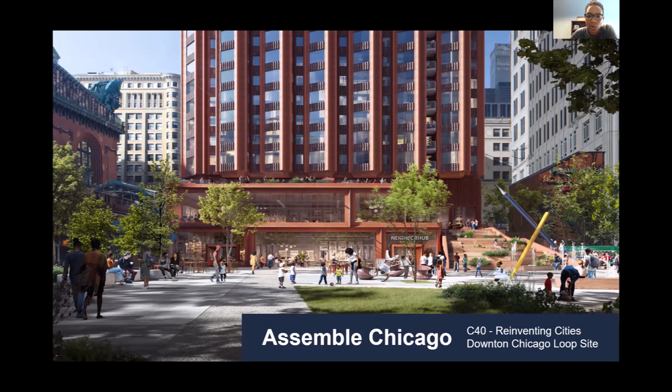Thanks, Brett. Hi, Kamina Brooks, Senior Project Manager with The Community Builders, also known as TCB. We are a mixed income housing and community developer. We also have a property management arm, as well as a community life arm, which provides wraparound services to our residents. We are headquartered in Boston, but we have regional offices throughout the East Coast and Midwest, including Chicago, and I operate out of the Chicago office. Excited to be here with the moderator, other panelists, and the guests today.

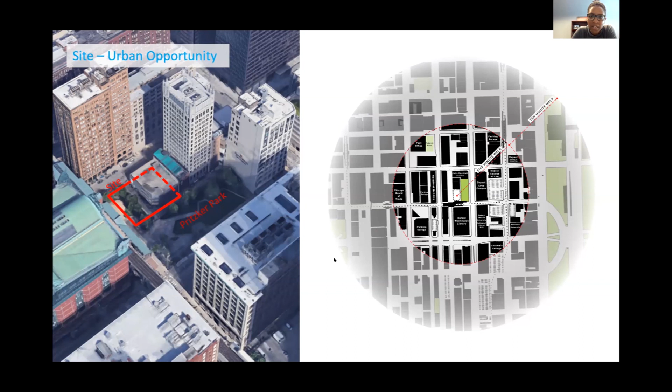In Chicago, the city identified an underutilized city-owned lot for the C40 Reinventing Cities competition in downtown Chicago. The site is an underutilized or unused parking garage and a sort of underutilized park, adjacent to public transit, as well as walking distance to employment opportunities, recreation, retail, cultural centers, and even the Chicago lakefront. I'll talk a bit about the project overview at the site.

In response to the RFP, we proposed a 20-story mixed-use building with 207 mixed-income apartments, affordable to moderate and low-income working households, within a carbon neutral development.

As part of the competition, we were tasked with incorporating C40's climate challenges into our development. The challenges C40 posed are around addressing energy efficiency, low carbon, climate resiliency, ecological services, green jobs, water management, and innovative architecture.

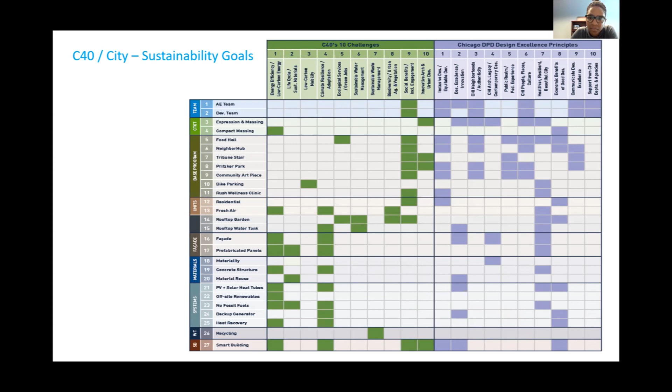Some of our sustainable features to highlight within the Assemble Chicago development include limited glazing on our facade, with a window-to-wall ratio of 25%. We also introduced a low carbon mixed concrete structure.

We are using a newly developed low carbon mix designed with up to 30% less embodied carbon. We're also incorporating smart building technology, which meters energy usage and provides data to residents to influence their behaviors, and with property management, we will seek to incentivize residents around energy and water reduction.

We are also incorporating efficient water systems, rainwater harvesting and rooftop storage for toilet flushing, highly efficient heat pump driven electric hot water heaters, and shower drain heat recovery, as well as fresh air systems with a hybrid natural ventilation mode.

In terms of sustainable transportation, our building is adjacent to the CTA transit system, the L station, and we are not incorporating any parking on site. Residents will have to rely on public transit as well as walkability to downtown jobs, schools, restaurants, and entertainment. Lastly, we have renewable energy generation through on and off-site solar PV arrays.

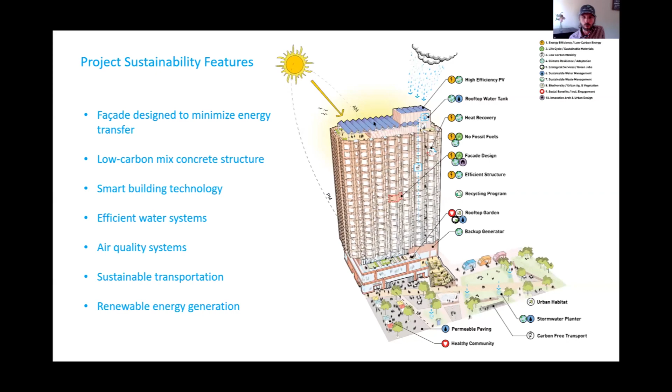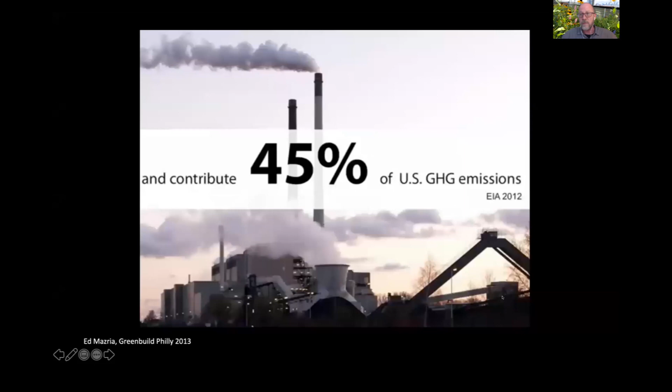My answer to the question is pretty straightforward: it's the only responsible thing to do. What do I mean by that? As an architect, the knowledge that buildings are responsible for almost half of all greenhouse gas emissions—let that sink in, half—means we don't have a chance in hell of solving the climate crisis if we don't solve it with buildings, period. Even though COP21, the Paris Climate Agreement, calls for essentially carbon neutral buildings by 2050, we don't even have that much time.

This is an interesting graph by Ed Mazria, who drew a line from peak emissions in 2020 to zero in 2050.

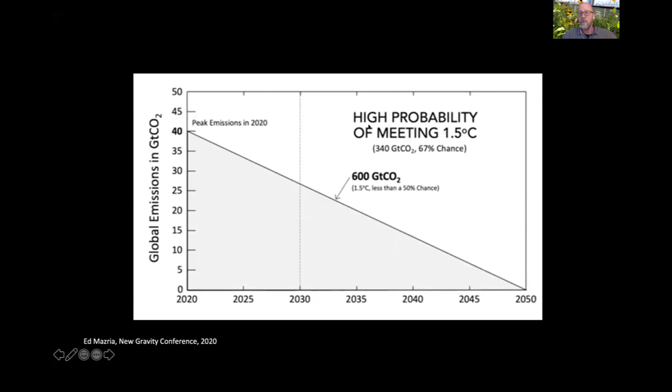That would be 600 gigatons of CO2 we'd be emitting. That's almost twice what we have to emit. And so we've squandered so many years. We actually don't have until 2050.

We've got less than 10 years to solve this. And what this means is carbon neutral buildings need to be standard by 2030. What does that mean? In my head, that means buildings need to generate what they need on their own site, not so much through carbon offsets, because I think that can get really tricky, but literally generating everything the building needs. So a typical row house like this has a roof that big to do all the work that it needs to do. And so how do you do that?

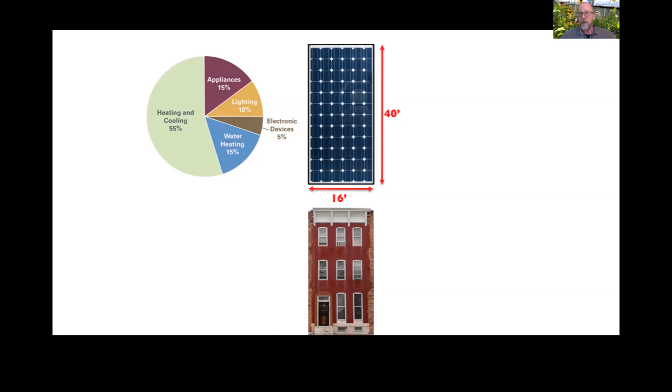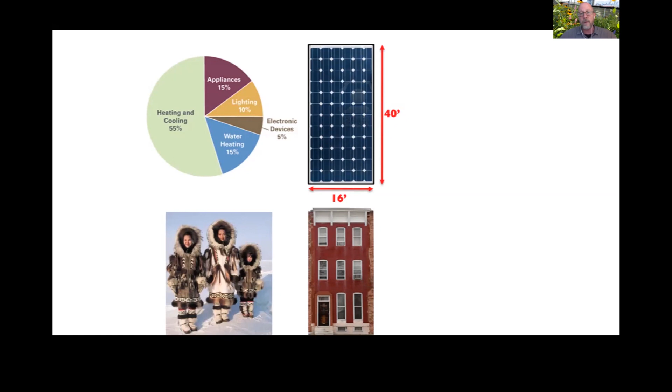Well, heating and cooling is more than half of the energy consumption. So what's the best heating and cooling system out there? It's a coat, a really good coat, a really tight and well-insulated coat. And that is the essence of Passive House, the Passive House building standard. It's a fabric-first approach to building. And it's the best tool that I know to radically reduce the amount of energy consumption that a building needs first. And that's what you got to do first before you talk about solar or anything else. It's basically just really, really good building science principles that we don't have enough time to talk about right now.

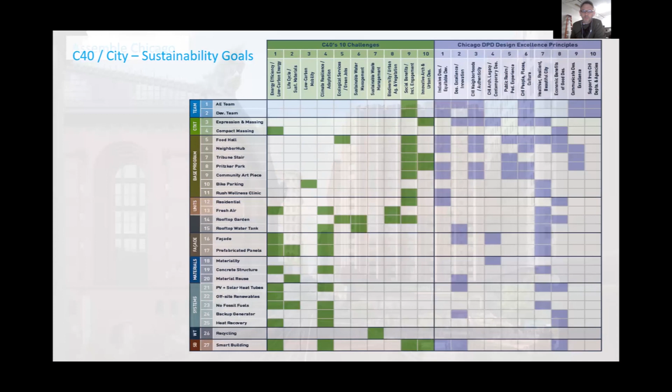And as you're bringing that up, as far as biggest challenges, boy, right now this is true across the industry. Right now, our biggest challenge is labor and materials, and our overall supply chain is really messed up. There's lots of reasons for that, but as we look to the future, issues of climate change are only going to make this worse. So there's a lot that we have to look for there in ways of solving that.

But big picture, in regard to our discussion today, one of the biggest challenges we have are commonly held beliefs that we ran into when we started going into this. One, electric heat is inefficient. We had that issue in getting financing on projects, where the appraiser came back and devalued our building because we took the step to eliminate all fossil fuels from the project. That gave us a lower appraised value, which impacted our ability to get financing. It ended up working out, but there are a lot of those commonly held beliefs that are still out there.

The second one is that heat pumps don't work in cold weather. With Brett's help on Bradford Station, we worked through those and ended up with a system that we've been very, very pleased with. And also, that sustainable construction costs more, that in order to make an energy efficient, sustainably designed building, you really have to pay a premium for it. In some cases, that is certainly true.

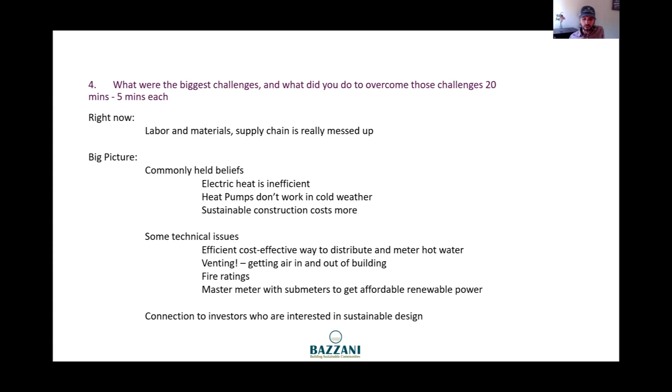Thank you, Peter. And Kamina, can you just tell us a little bit about some of your big challenges with this project and how you're looking to overcome them?

Yeah, and I will say that the project is early on in the process. We were selected as part of an RFP, and there are likely, as we all know, to be many challenges ahead. I don't have a long list of challenges we've faced thus far, but I certainly know there will be many as we work through the next phase of the project. But one of the challenges for us as we responded to the RFP was...

...managing through solar, particularly on-site solar. On a high-rise development, especially in a compact urban environment, you can only pack in so much renewable generation on site, and there's typically just not enough space to offset the energy usage of the building.

We overcame the challenge by identifying another TCB development site called Oakwood Shores, about 4 miles south of Assemble Chicago. The site has expansive parking as well as rooftops, and we identified that site for off-site renewable generation rather than just completely buying out. On site at Assemble Chicago, we will deliver about 57.5 kilowatts of solar array, and then can pick up an additional 650 kilowatt solar array at Oakwood Shores.

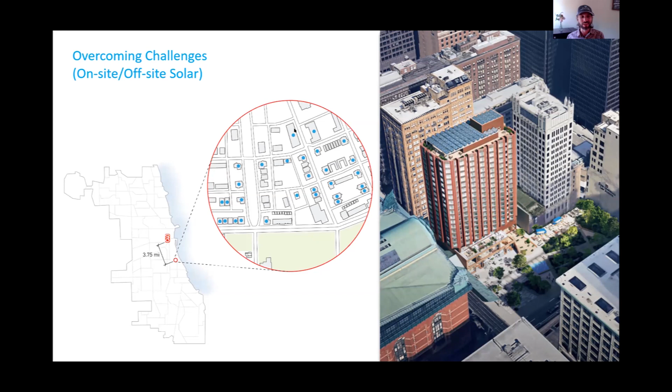And Tim, we'll hand it off to you now. Okay.

As this is opening up, I should say, Kamina, I was on a team that competed on that site, and while I'm not happy we lost, I'm certainly happy you guys won. Let's just put it that way, because it's a great project. My answer is very simple: getting to zero on a budget.

I'm going to go rapid fire here because I'm going to show you a lot. Just hold on to your seats. What do I mean by that? Well, you've got to rethink everything. We are a vertically integrated company, we're the developer, the architect, the builder.

We even have a green roof and solar company. We've calculated that cuts out about 15% of the costs to build a project, so I'm a huge fan of vertically integrating. You don't have to be the architect, developer, and builder, but maybe design-build contracts, and we did that on this project.

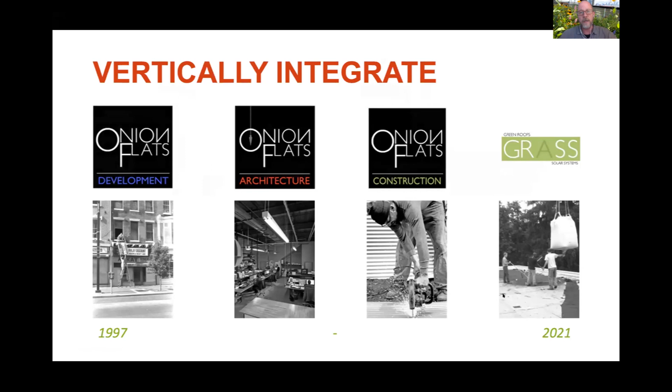It's a 26-unit townhome development. The other really important thing we take on with every project, if we're to stay at these kinds of numbers—and at that time this was comparable to code-built construction at $150 a square foot—is that we have to not just rethink how we design buildings, but rethink how we make them. So we started a modular company around this time.

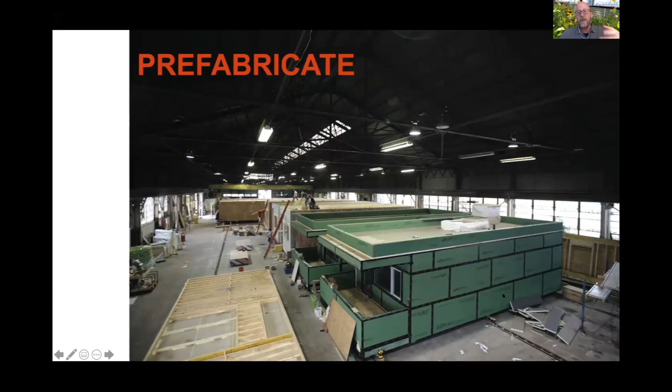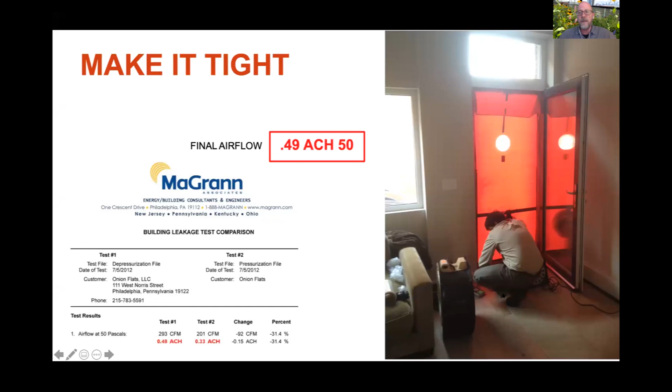These are designed to the Passive House standard. 3 of the 25 units were built this way. The other thing you've got to do, and it doesn't cost any money, is make it tight. 0.6 air changes per hour at 50 pascals is a Passive House. This was 0.49. These are those 3 houses.

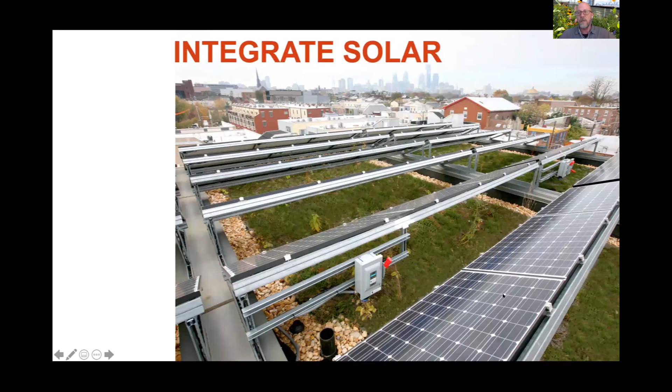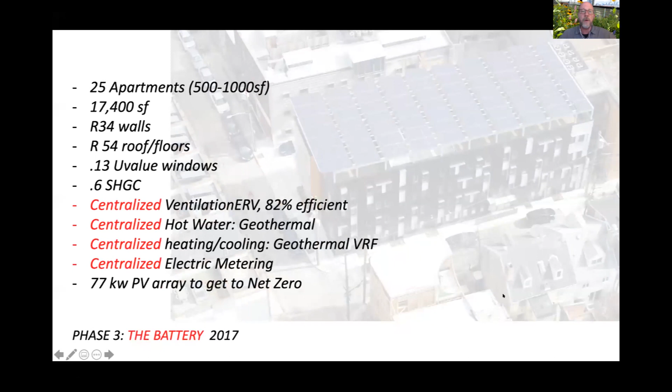People that say you can't do green roofs and generate power, you should tell them no. You've got to integrate solar. Don't think about solar as an additional cost, and you'll see what I mean by that in a second. This takes it to another level—this is a 25-unit apartment building, small units, all centralized systems, which I won't go into.

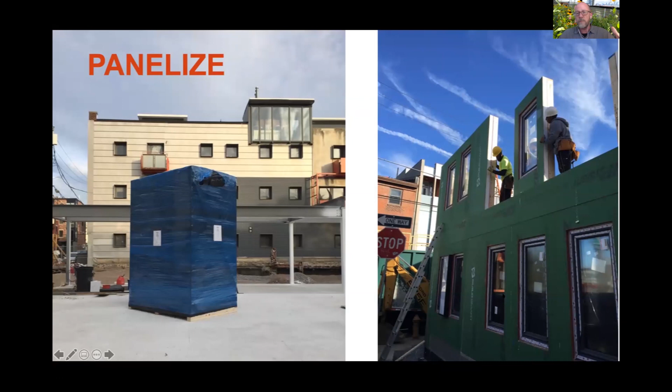But again, every project that we've done in the past years, we prefabricated it in some way. In this case, we panelized the envelope, which is a high performance envelope with triple pane windows, exterior rigid insulation, WRB. We also did what Peter can't do, I guess, in Michigan.

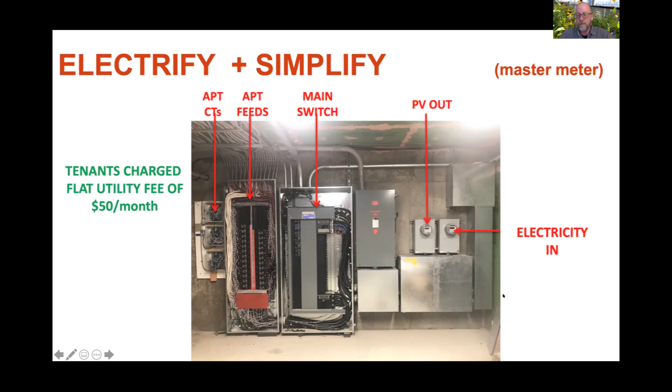We have a master meter. Why spend all the time, space and money on 28 meters when the utility bills are going to be about $50 a month? Why not have a master meter and charge tenants a flat fee? They love it, it simplifies everything.

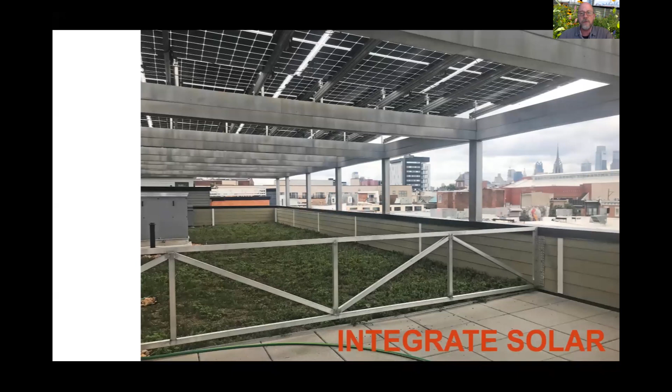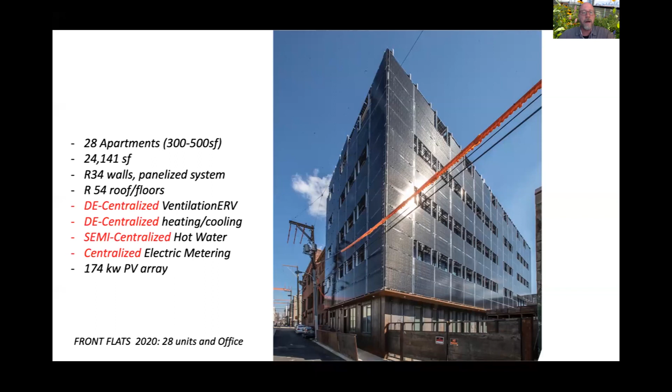But again, to stick at below $170 a square foot in 2017—this is code-built construction—how do you do that? Well, you bring solar into the financial picture as well, the revenue side of things. This is a case where we really pushed the element of solar beyond just generating power. This is a 28-unit apartment building we just completed at $180 a square foot, just north of the last one. And the integration of solar here is more than just generating power.

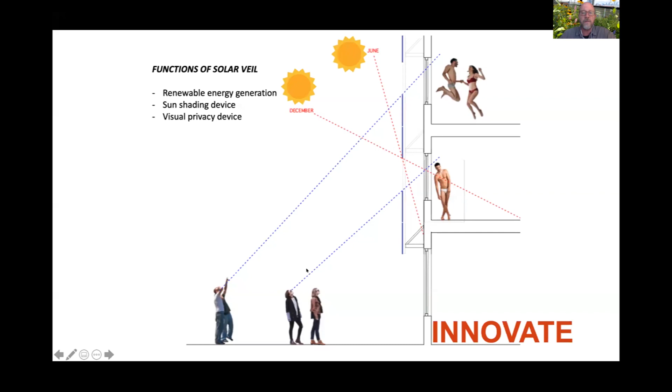It has multiple functions. It's floating away from the building by about 24 inches, and it does the all-important shading of this building in the summertime because of that. So it's a shading device, it's a visual privacy device, and it's also generating all the power for the building. It also creates a really wonderfully shaded but totally livable green roof where people can grow their own vegetables. At the moment, this past year, it generated 26,000 kWh more than the building needed.

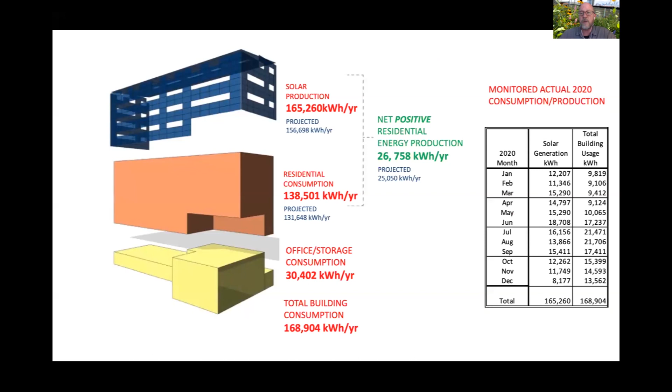So what does that mean? That means utilities can start to become revenue generation line items in your budget. So that's what I mean when I say integrate.

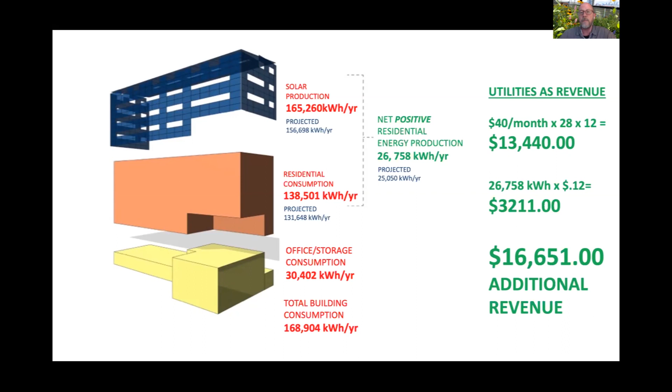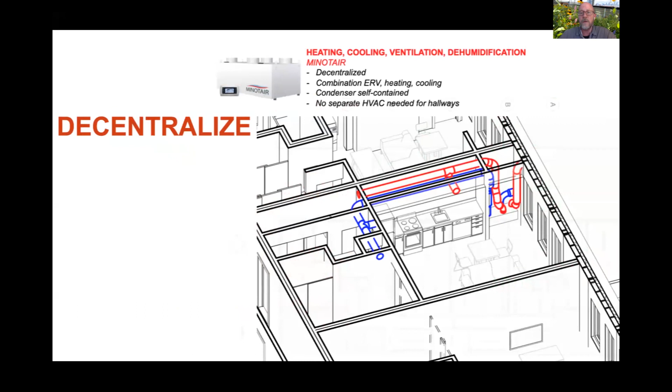Decentralize. We're questioning the whole centralization of mechanical and hot water systems. This is a heat pump and ERV combined, where the condenser is built into the unit, so there are no condensers and line sets on the roof. It fits nicely into the cabinetry.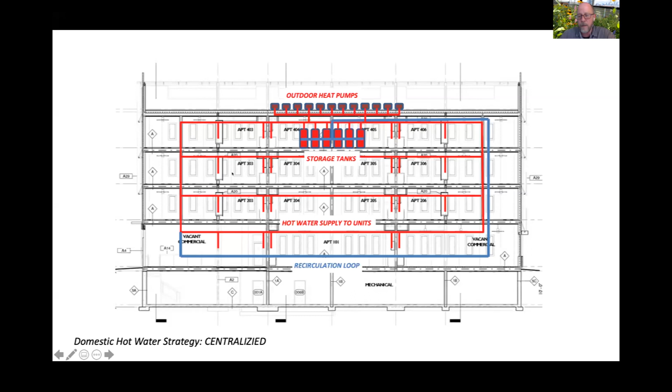Huge heat loss from the recirculation loops, lots of piping. We took our cues from the sewer pipes in the building, because by code, the premise is you've got a straight shot, short horizontal runs for venting reasons. So we did the same thing.

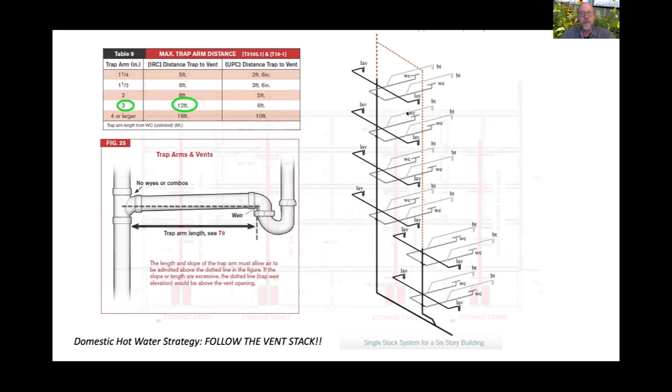We decentralized the hot water by stacking them below where all of the fixtures are in the basement, with very short horizontal runs. And then our recirc loop is actually inside our supply line.

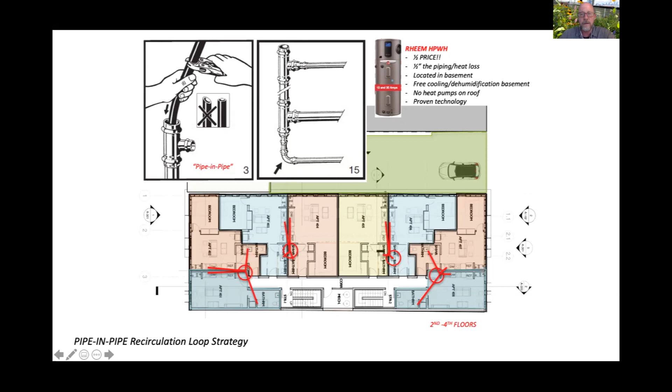I know that sounds crazy, but that's what we're doing. So here's the supply line, the recirc loop is inside it. So why? Because we cut the piping in half, we cut the insulation in half, we cut the cost in half, and we cut the heat loss of that system in half.

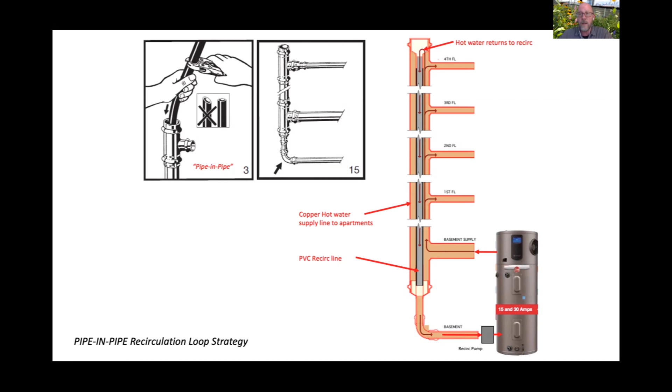And there's typical heat pump water heaters. And that's all I have for right now.

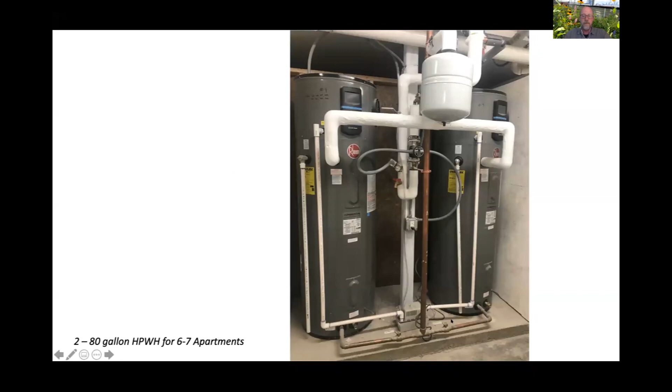Hey, thanks, Tim. And we're gonna finish here with Matt Hollander, again just looking at some of his biggest challenges with his creamery project, and what he did to overcome those.

The biggest challenge, in my opinion, every single time we do a development, is finding the highest and best use for the site. Part of that question involves the community, because if we're developing something, we want to do it with the community. We don't want to do it to the community.

On the creamery, we were actually lucky when it came to this, because the creamery is part of a long-term, multi-year redevelopment.

Brett, we lost the sound.

And Bison Associates, the architect we worked with, held a series of community charrettes where the neighborhood actually was able to come together and decide what they wanted to see on this site, which was a brownfield site.

So we started with a very messy, sort of malignant building that was an old industrial building. It had originally been a brewery, and then for the longest time it was a creamery. We're not very creative when it comes to names, so that's why we named the project Creamery.

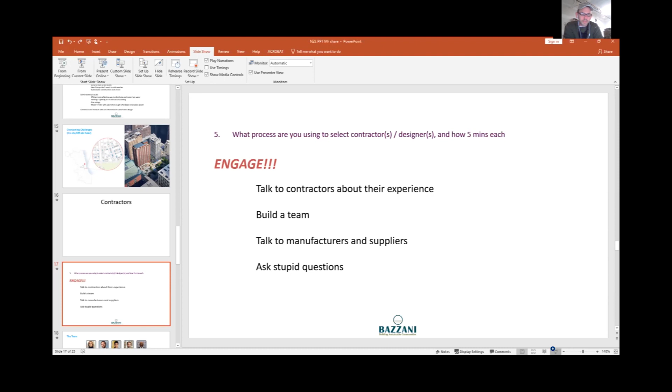The simple response to this is engage, just getting involved, talking to people. So talking to contractors about their experience, and it's not always that they have done this, but that they have a desire to, that they want to learn, that they want to try to do the next best thing, that they have a good relationship with designers, whether that's architects or mechanical, electrical engineers and such, and also with their suppliers and the manufacturers. Are they interested in the next things that are coming out from equipment manufacturers? And then with that, building a team.

As a contractor, you have to be careful about making sure that you have multiple contractors available for each trade, and you have to be careful about price, obviously. But I think that having a team, people that have worked together on multiple projects, trumps all of that. Once you've gone through that experience with them on a project and really worked out the details, building a project together, you don't want to lose that. Taking that team over to the next project and figuring out how to do it better.

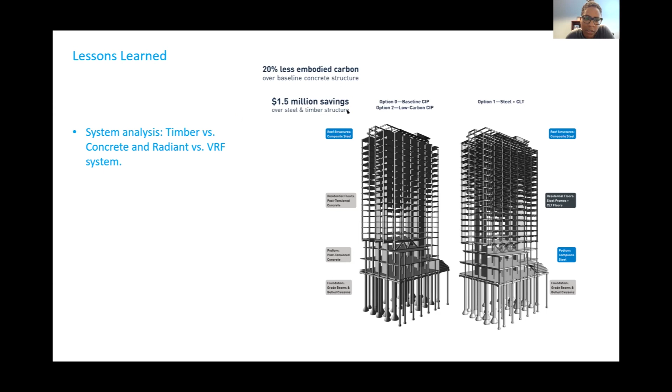The second lesson learned was around radiant versus VRF. Through design analysis, we had initially expected that a radiant heating and cooling system would be the most efficient and effective option for the project, given the height of the building and the limited area available on site. A geothermal well field was not a good solution for the project, since the necessary size of the geothermal field to provide enough heating and cooling exceeded the area available on site and would require supplemental systems. Any all-electric solution to hot water production is not efficient at the extreme low temperatures of the Chicago winter. Our analysis showed that VRF performed as well, or even in some cases better, than the radiant system, and once we priced it out, it was a much more economical choice. So we ultimately went the VRF route over the radiant route.

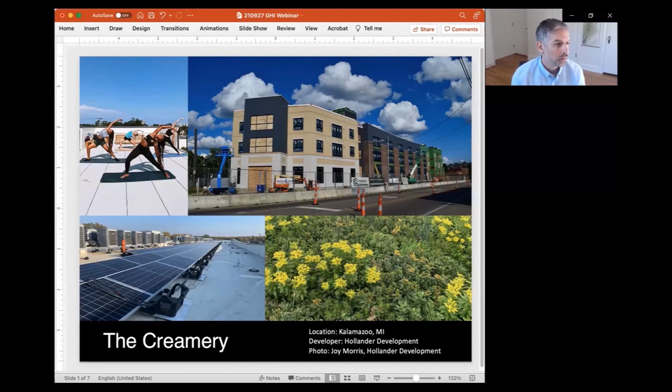Which is what you're seeing in the top right photograph here. So that's the main entrance to the building. We're still under construction in this photograph. We've been open since mid-February.

So this is a dated photo, but it does show the zip sheathing that we used. It's the green sheathing down at the other end of the building here. You can see it on some of the middle portions as well.

We did continuous insulation on the entire building envelope and really focused a lot on exterior air sealing and compartmentalization between the different residential units. We didn't go as hard on R-value and chose instead to focus on sealing it up.

On the bottom left, you can see the PV array that we installed. One of the things that we did on the project is we set a budget for PV on day one. So from our first trade payment breakdown, our first construction budget, we knew that we were going to spend about $75,000 on photovoltaics. And we factored that into our entire capital stack.

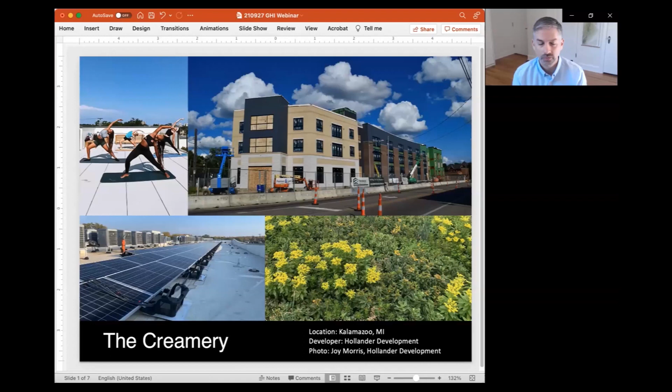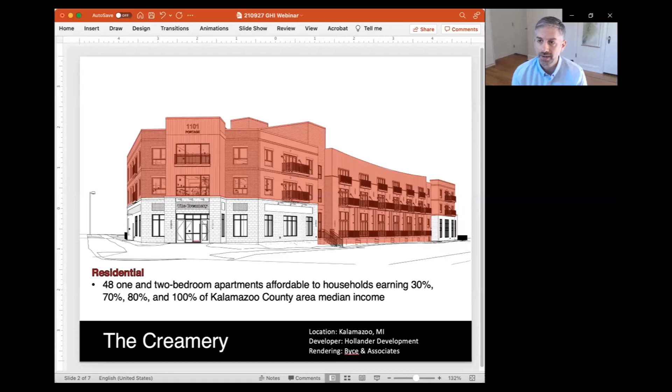The building is put together with 48 residential units, all 1 and 2 bedroom apartments, generously sized. Our units start at about 675 square feet and go up to about 1,200 square feet. It's a mixture of low-income housing and what we call workforce housing, with income restrictions ranging from 30 to 80% of area median income, plus a certain number of units intended for people right at 100% of Kalamazoo's AMI.

So we're doing energy recovery throughout the entire building in conjunction with providing fresh air at all times. We still have fully ducted range hoods and bathroom fans, and all of the appliances are Energy Star.

Each unit is very tightly compartmentalized from all the other units. One of the only issues we ran into in terms of the green construction aspects of the project is air sealing between the ducts and the interstitial space within the units. We had really tight compartmentalization unit to unit, but had to do some additional air sealing after occupancy to make sure the ductwork was sealed to the drywall and that we weren't getting air infiltration into the wall cavities. One of the big lessons we learned is that we need to be much more specific on our air sealing details with the general contractor and subcontractors.

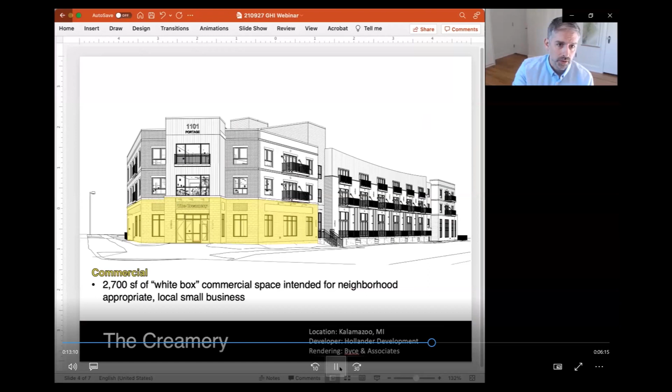One of the biggest lessons we learned here, and I'll keep going a little bit - this is the commercial space on the ground floor. One of the biggest lessons we learned is having diversity of funding is actually a major bonus when it comes to trying to go for deep green construction like net zero ready.

In this case, we were combining affordable housing with two other uses: the commercial space I just glossed over because it's a minor portion of the building, and this YWCA Children's Center. We worked with YWCA Kalamazoo to establish what they call the YWCA Edison Children's Center, in the Edison neighborhood in Kalamazoo - that's where the name comes from. This is a 7,800 square foot early childhood learning center, which has first, second, and third shift childcare, as well as 24-hour emergency drop-in services.

So this is a big deal. This is the first childcare center like this that has been built in Michigan. And we worked with YWCA at various levels during the financing of the project.

So they did a major capital campaign, and we actually worked with social impact investors who provided a form of financing to the project on the side of the residential. When we talked to those funders, one of the first things we brought up was that we were going for LEED Platinum. So from day one, those foundations were excited that we were going for LEED Platinum.

And whenever somebody along the line came to us and said, this is really expensive construction—which it actually wasn't, I'll get to that later—but can't we cut costs by going with LEED Silver or something less expensive, it gave us cover to just say no. If we do that, we could potentially lose these foundation investments we've already negotiated, and that's non-negotiable. It's just part of the project.

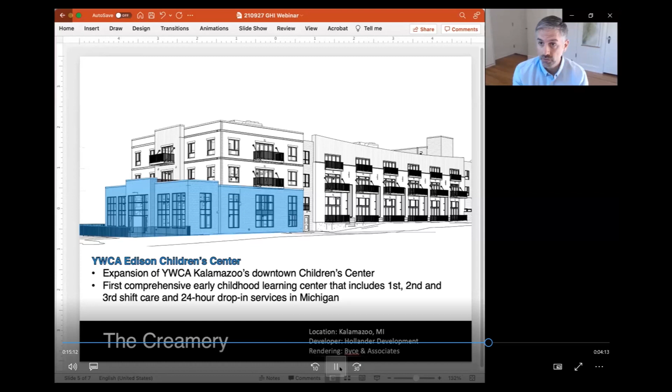We wanted to make sure the residential was net zero ready. So I don't want to leave anybody thinking we did the entire 60,000 square feet, but 87% of that is net zero ready.

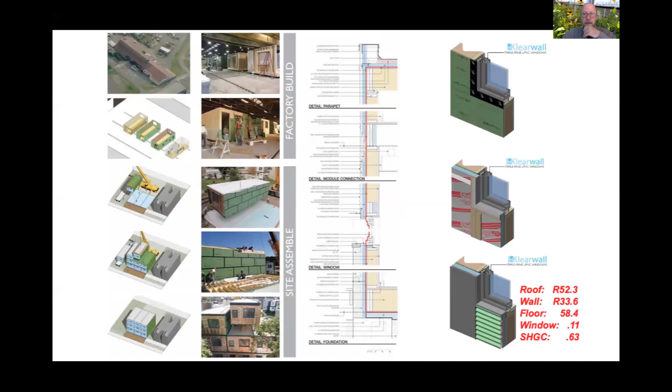I want to talk about the low-income housing tax credits, because as architects, we've done a ton of affordable housing. We started this initiative back in 2014 after we completed the first certified passive house project in Pennsylvania, which was this project, Belfield Townhouses, just 3 townhomes, but for formerly homeless families, and it was funded through tax credits. It was our first passive house project, built in our factory, with a PV array on the roof to generate what the building needed. We built it at $129 a square foot.

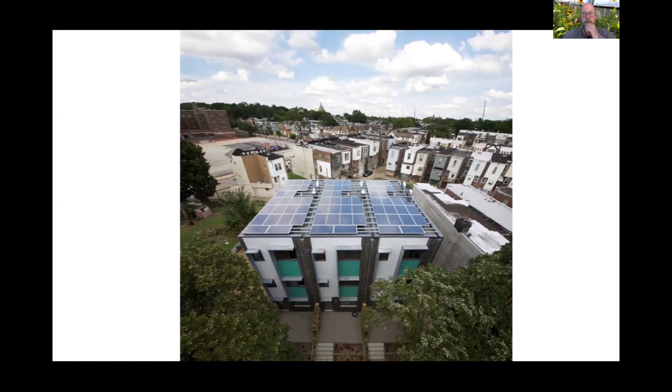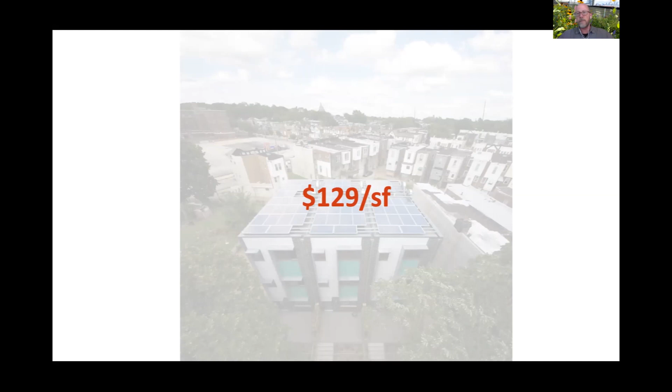So we leveraged this as an opportunity to maybe get a much larger movement going, because it's one thing to build your own individual project and get people excited, but how do you move the industry forward? So we dug in and learned a lot about low-income housing tax credits. A group of us went to the Pennsylvania Housing Finance Agency, showed them this project and said, why can't everybody do this? If we can do this for the first time, why can't everybody do this?

So we literally just boldly requested that they make all affordable housing net zero capable by 2030, and we asked them to use passive house as the tool, but we didn't quite know how to do it. That's when they told us about the QAP, which I'm sure many of you know all about. This is actually the process by which it's a point-based system, as Kamina said, extremely competitive. And we didn't realize that the competitive nature of the QAP was the secret sauce for this initiative to actually work.

So what they did was they put 10 extra points in for developers to take on passive house, and they thought maybe a couple of people would give it a shot. Well, more than a couple of people gave it a shot — 38% of the projects that applied did so as passive house projects. And they funded 7 multifamily passive house projects in the first year.

Did we lose Tim, or is that on my end? Oh, I don't know. Did you lose me? I can still hear Tim. No, I can still hear you. Yeah. Okay, let me just keep going because it's going to get hot here.

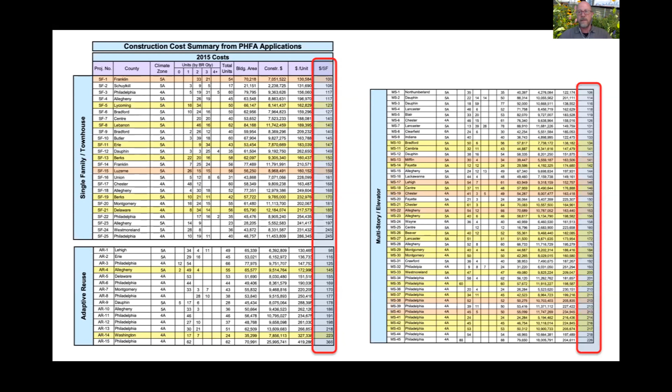Here are the costs. For a passive house building that uses 75% less energy than a code-built building, they came in at 2.5% more on average. The Pennsylvania Housing Finance Agency said you can do that within your contingency. Let's keep going. So they got built, all 7 got built, on budget and on time within their contingencies.

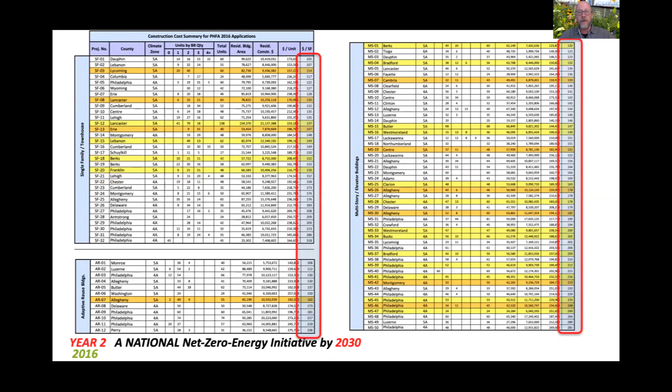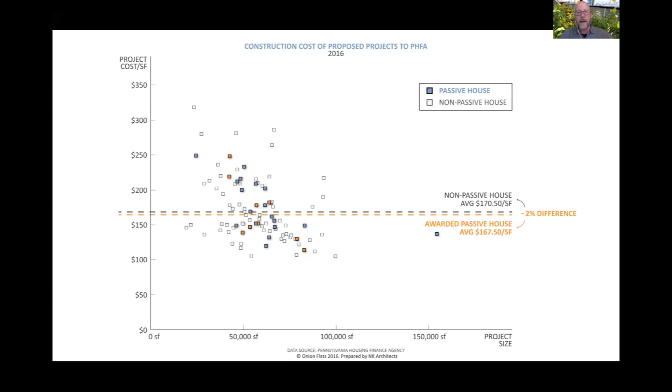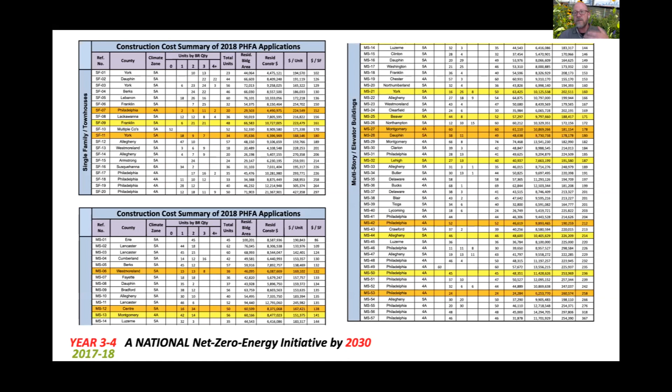And then year 3 and 4, 2017 and 18, they funded another 8 multifamily projects, and the exact same thing happened. So this isn't about some boutique design build developer like us trying to demonstrate it. This is everyday developers, architects, and builders building at cost parity to code-built buildings.

There's a ton of affordable housing projects built to the Passive House standard coming up. And then even the ones that don't have it in their QAPs, they're on their way, because these buildings are being built there anyway, because it makes sense in Vermont, Minnesota, Missouri, Oregon, Maine - all over the place. I wanted to leave that as an important way to talk about financing, because I think one of the critical misnomers that needs to be dispelled is that these things have to be more costly, and have to have this completely unique financial structure to make them work, and they don't.